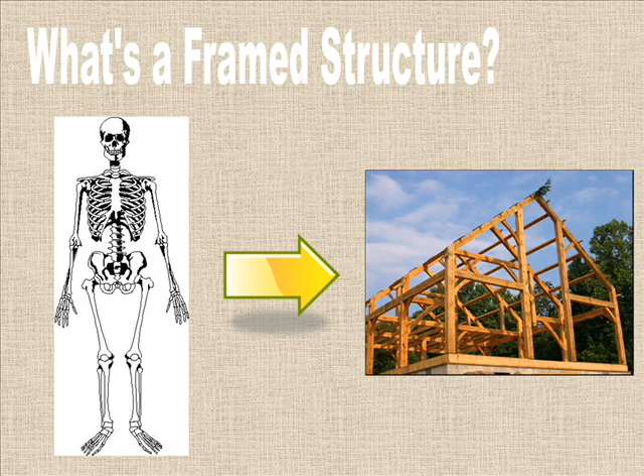Framed structures. A framed structure is a structure supported mainly by a skeleton or frame of wood, steel, or reinforced concrete, rather than by load-bearing walls. This type of construction should be able to resist deformation without depending on floors or walls. Rigid frames have fixed joints that enable the frames to resist lateral forces. Other frames require diagonal bracing or shear walls and diaphragms for lateral stability.

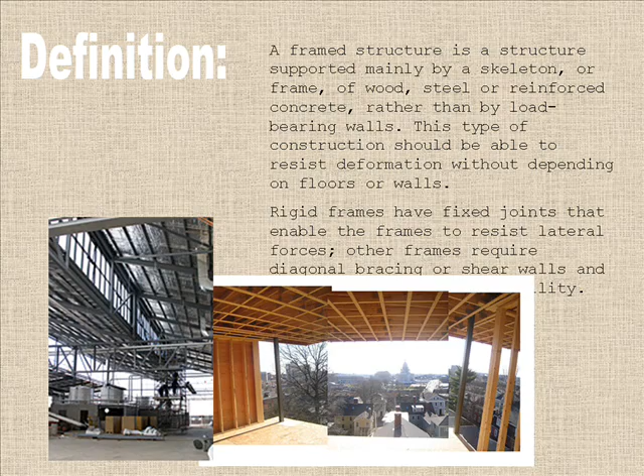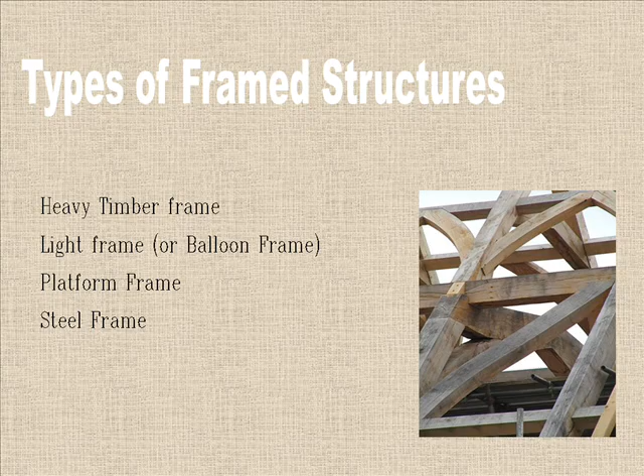There are different types of framed structure, such as heavy timber frame, light frame or balloon frame, platform frame, and steel frame. Timber frame. This type of construction was the commonest type of construction in Eastern Asia and Northern Europe from the prehistoric times to the mid-19th century.

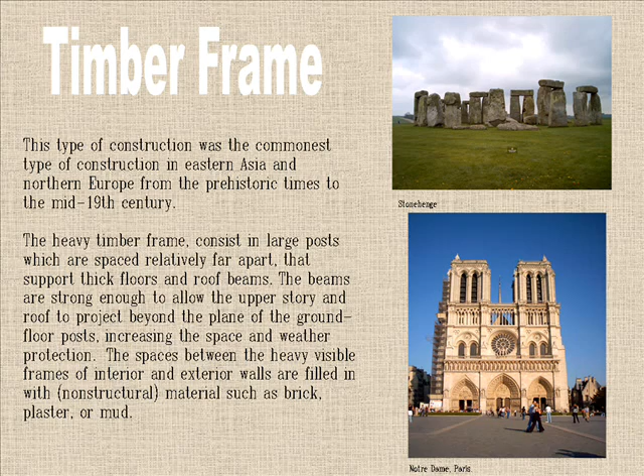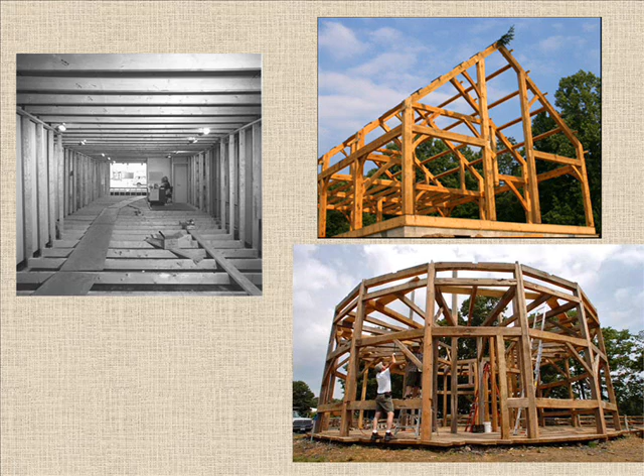The heavy timber frame consists of large posts which are spaced relatively far apart that support thick floors and roof beams. The beams are strong enough to allow the upper story and the roof to project beyond the plane of the ground floor posts, increasing the space and weather protection. The spaces between the heavy visible frames of interior and exterior walls are filled with non-structural materials such as brick, plaster, or mud.

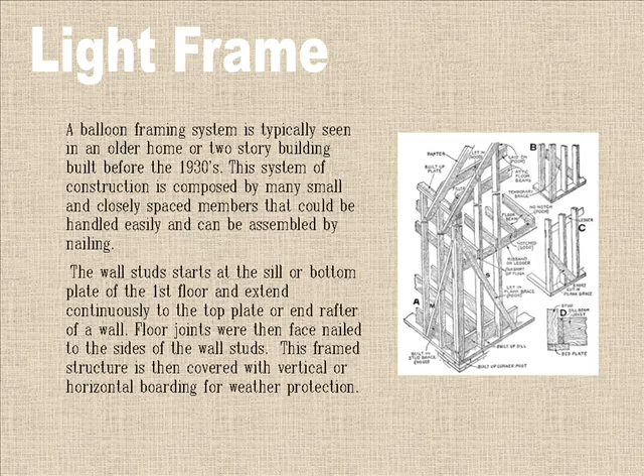Light frame or balloon frame. A balloon framing system is typically seen in an older home or two-story building built before the 1930s. This system of construction is composed of many small and closely spaced members that could be handled easily and can be assembled by nailing. The wall stud starts at the sill or bottom plate of the first floor and extends continuously to the top plate or end rafter of a wall. Floor joists were then face nailed to the sides of the wall studs. This frame structure is then covered with a vertical or horizontal boarding for weather protection.

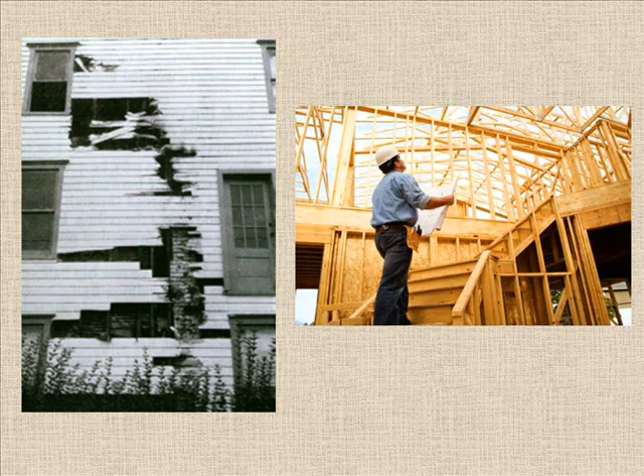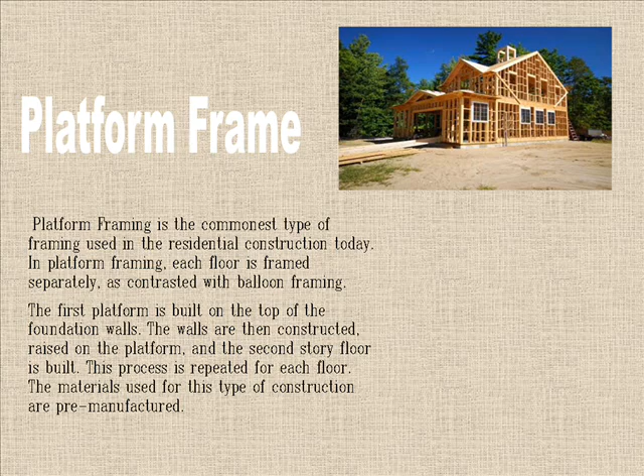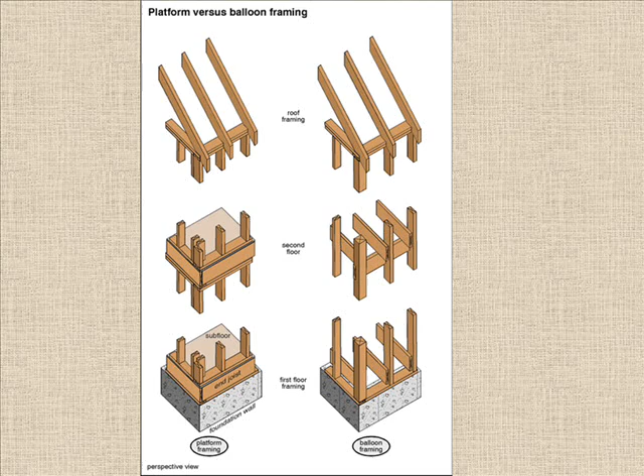Platform frame. The platform framing is the commonest type of framing used in residential construction today. In platform framing, each floor is framed separately, in contrast with the balloon framing. The first platform is built on top of the foundation walls. The walls are then constructed, raised on the platform, and the second-story floor is built. This process is repeated for each floor. The materials used for this type of construction are pre-manufactured.

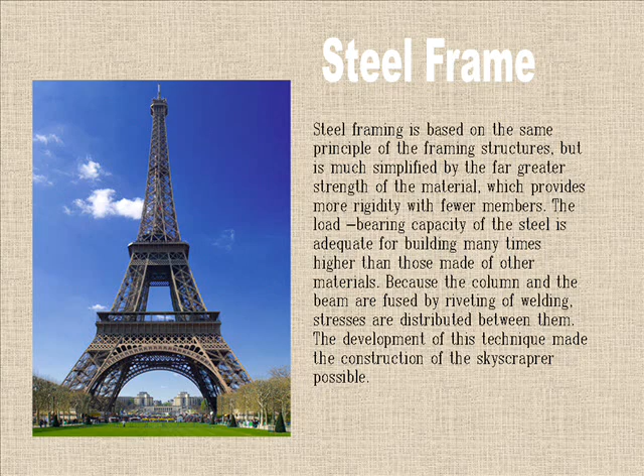Steel framing. Steel framing is based on the same principle of the framing structure, but is much simplified by the far greater strength of the material, which provides more rigidity with fewer members. The load-bearing capacity of the steel is adequate for buildings many times higher than those made of other materials, because the column and the beam are fused by riveting or welding. Stresses are distributed between them, and both can be longer and lighter than in structures in which they work independently as post and lintel. Thus, large cubic space can be spanned by 4 columns and 4 beams, and buildings of almost any size can be produced by joining cubes in height and width.

The steel frame is also used in a single-story building where large spans are required. The simple cube then can be abandoned for covering systems employing arches, trusses, and other elements in a limitless variety of forms in order to suit the functions of the building. The development of this technique made the construction of the skyscraper possible.

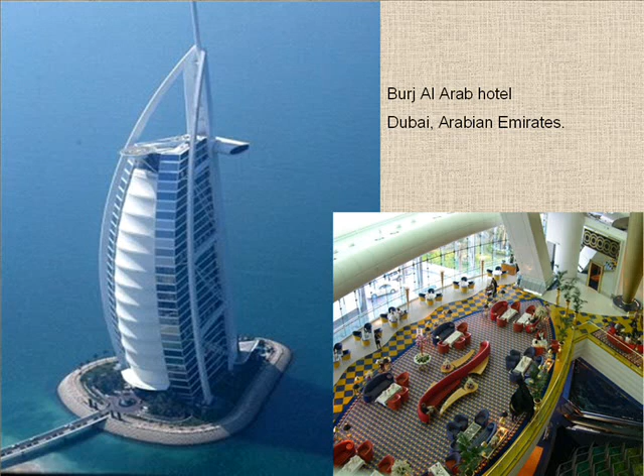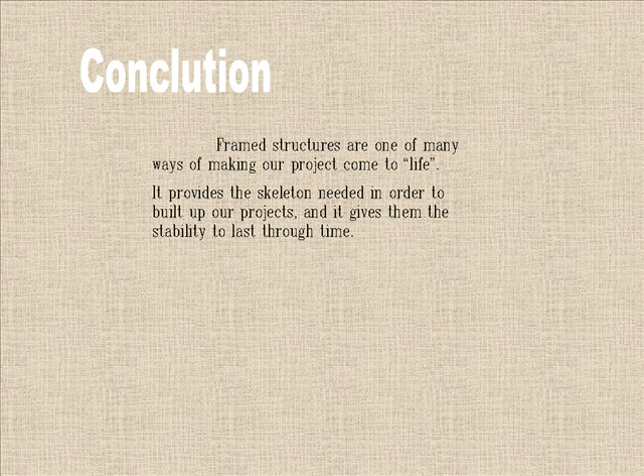Conclusion. Frame structures are one of the countless ways of making our project come to life. It provides the skeleton needed in order to build up a project, and it gives them the stability to last through time.